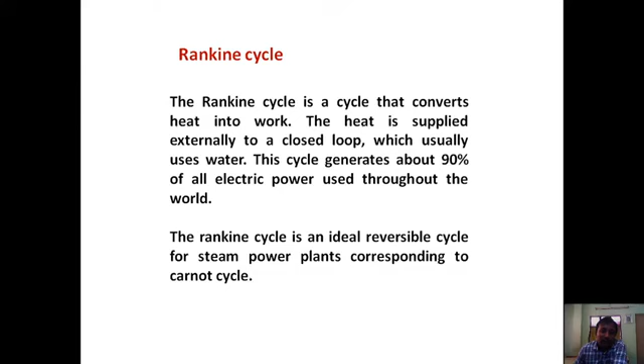The topic I will discuss today is Rankine cycle. Rankine cycle is a cycle that converts heat into work. The heat is supplied externally to a closed loop which usually uses water. This cycle generates about 90% of all electric power used throughout the world. The Rankine cycle is the ideal reversible cycle for steam power plants, corresponding to the Carnot cycle.

Vapor power cycle. We know that a Carnot cycle is the most efficient cycle operating between two specified temperature limits. However, the Carnot cycle is not a suitable model for steam power cycles because the turbine has to handle steam with very low quality, which may cause erosion and wear in the turbine blades. Also, it is impractical to design a compressor that will handle two phases.

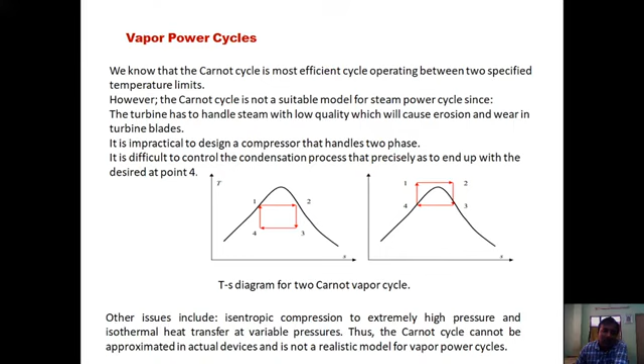Also, it is very difficult to control the condensation process so precisely as to end up with the desired quality at point 4. So, the Carnot cycle is not a suitable model for steam power cycles. Other issues include the isentropic compression to extremely high pressure and isothermal heat transfer at variable pressures. Thus, the Carnot cycle cannot be approximated in actual devices and it is not a realistic model for vapor power cycles.

Ideal Rankine cycle. The Rankine cycle is the ideal cycle for vapor power plants. It includes four reversible processes. 1 to 2 is isentropic compression. Water enters the pump at state 1 as saturated liquid and is compressed isentropically to the operating pressure of the boiler. From 2 to 3, it is constant pressure heat addition. Saturated water enters the boiler and leaves as superheated vapor at state 3.

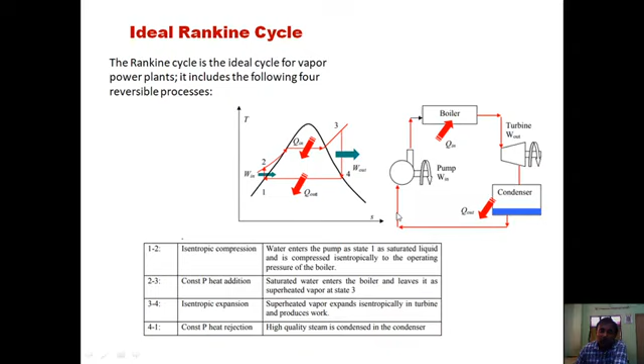And 3 to 4 is isentropic expansion. Superheated vapor expands isentropically in the turbine and produces work. And 4 to 1 is constant pressure heat rejection. High quality steam is condensed in the condenser. This is the TS diagram. This is the schematic diagram of the Rankine cycle.

Now the energy analysis for the cycle. For the pump, W pump will be H2 minus H1. Boiler Q in will be equal to H3 minus H2. For the turbine, Q will be 0 and turbine work will be H3 minus H4, and at the condenser Q out will be H4 minus H1. So the thermal efficiency of the cycle will be 1 minus Q out divided by Q in. We can also say W net divided by heat supplied.

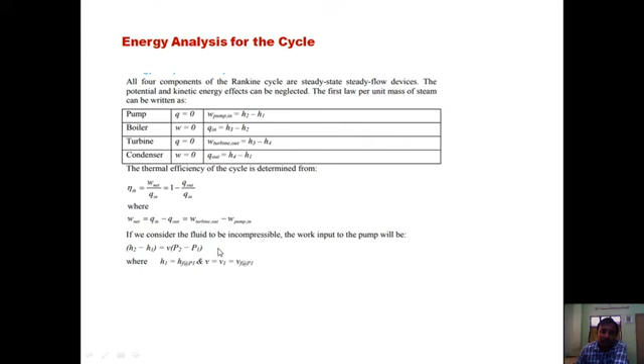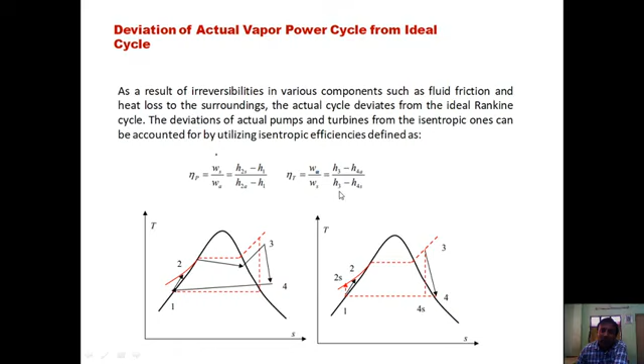Deviation of actual vapor power cycle from ideal cycle. As a result of irreversibilities in various components such as fluid friction and heat loss to the surroundings, the actual cycle deviates from the ideal Rankine cycle. The deviation of actual pumps and turbines from the isentropic ones can be accounted for by utilizing the isentropic efficiency, defined for the pump as Ws by Wa, that is H2S minus H1 divided by H2A minus H1, and for the turbine Wa by Ws, that is H3 minus H4A divided by H3 minus H4S.

Now, how to increase the efficiency of the Rankine cycle? We know that the efficiency is proportional to 1 minus T lower divided by T higher. So, to increase the efficiency, one should increase the average temperature at which heat is transferred to the working fluid in the boiler, and/or decrease the average temperature at which heat is rejected from the working fluid in the condenser.

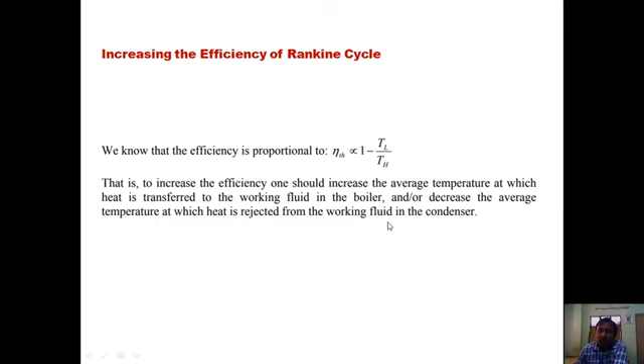Now, decreasing the condenser pressure. Lowering the condenser pressure will increase the area enclosed by the cycle on the TS diagram, as you can see in this particular figure, which indicates the net work will increase, thus the thermal efficiency of the cycle will be increased.

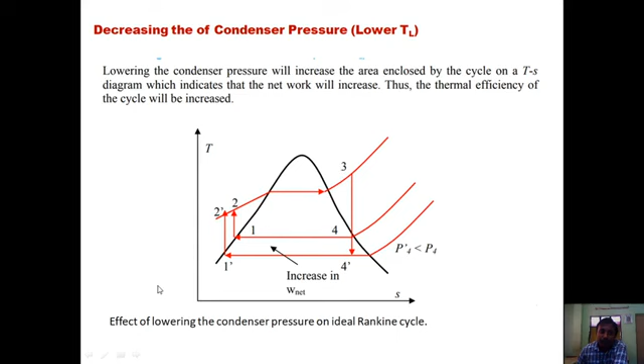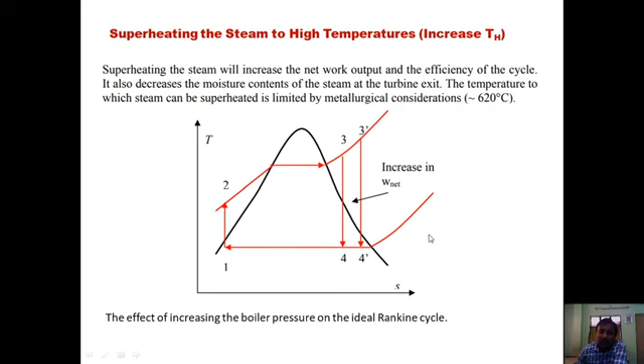Increasing the boiler pressure. Increasing the operating pressure of the boiler leads to an increase in the temperature at which heat is transferred to the steam, and thus raises the efficiency of the cycle, as you can see in the diagram.